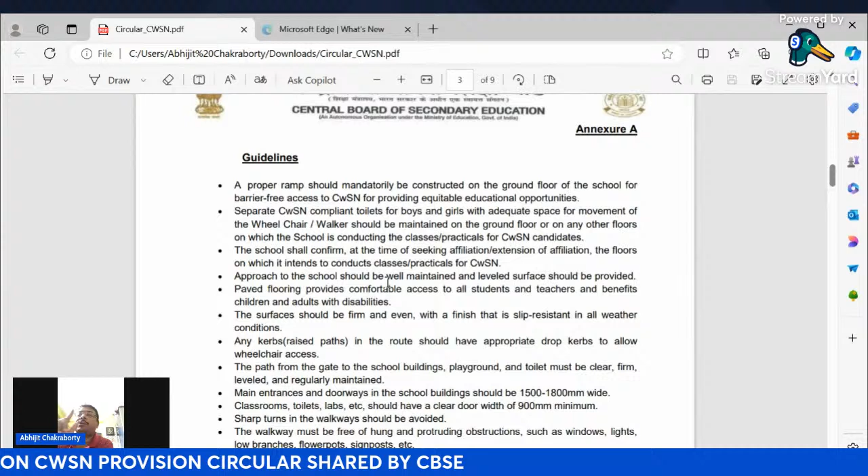Number one, a proper ramp should be mandatory to be constructed on the ground floor of the school for barrier-free access to CWSN, providing equitable educational opportunities. The accessibility of the ramp from ground floor to top floor is common for all CBSE schools, but what is not common, I am going to discuss.

Number two, separate CWSN compliant toilets for boys and girls. We know about girls toilet, boys toilet with CWSN. The wheelchair or walker should be maintained on the ground floor or any other floor where the school conducts classes or practicals for CWSN candidates. It will be better if the CWSN candidate's class is taken on the ground floor.

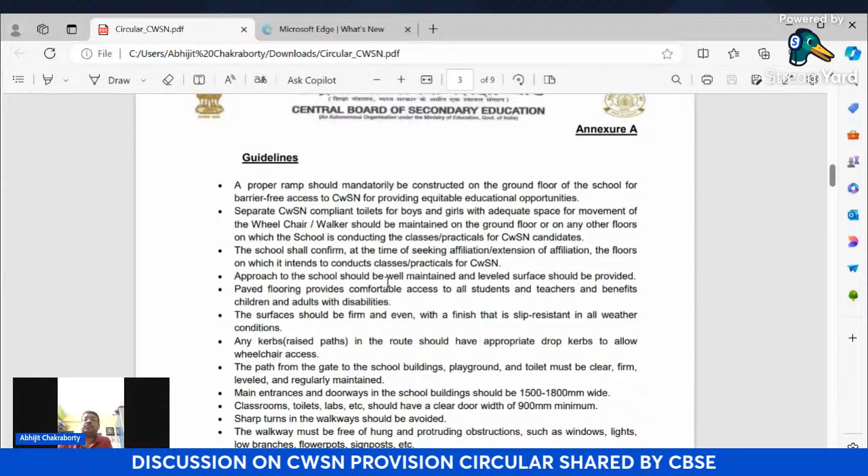The school shall confirm at the time of seeking affiliation the floors on which it intends to conduct classes, practicals for CWSN. That means specification will be given as to which floor the CWSN candidates will take classes. My suggestion is that it should be on the ground floor, which will be good for the CWSN candidates.

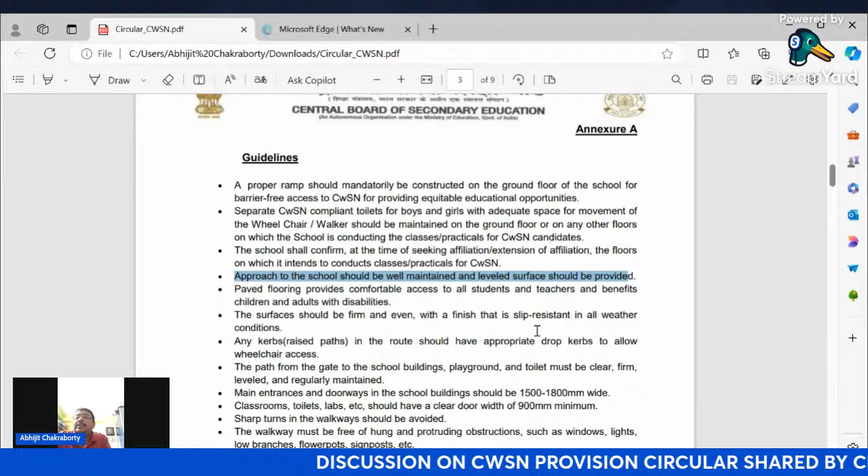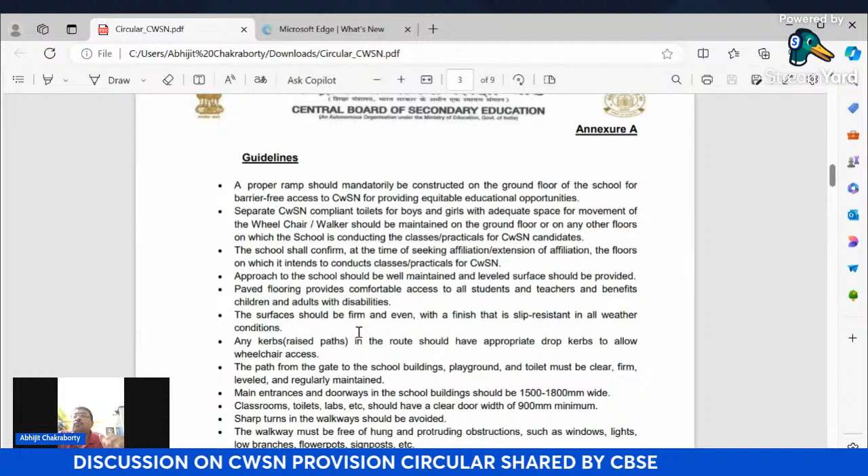Next is approach, a very important thing. The approach of the school should be well maintained and a level surface should be provided. That was not in the previous circular, but it is included in this circular. Paved flooring provides comfortable access to all students and teachers and benefits children with disabilities. The surface should be firm, even, with a finish that is slip resistant in all weather conditions.

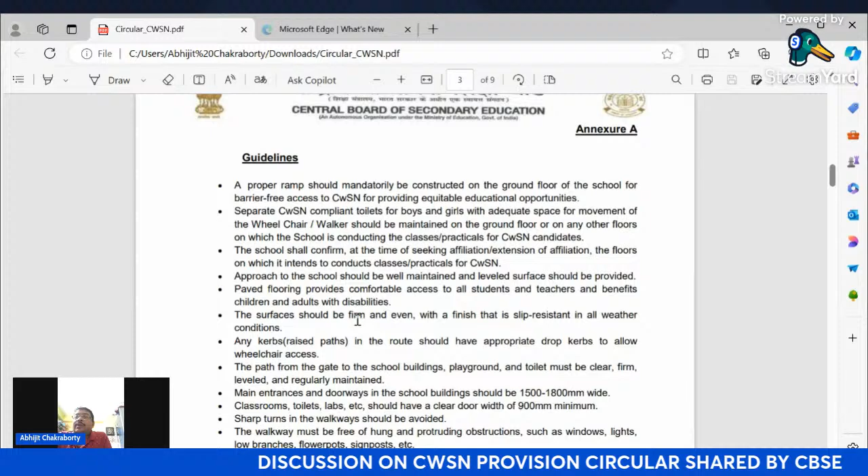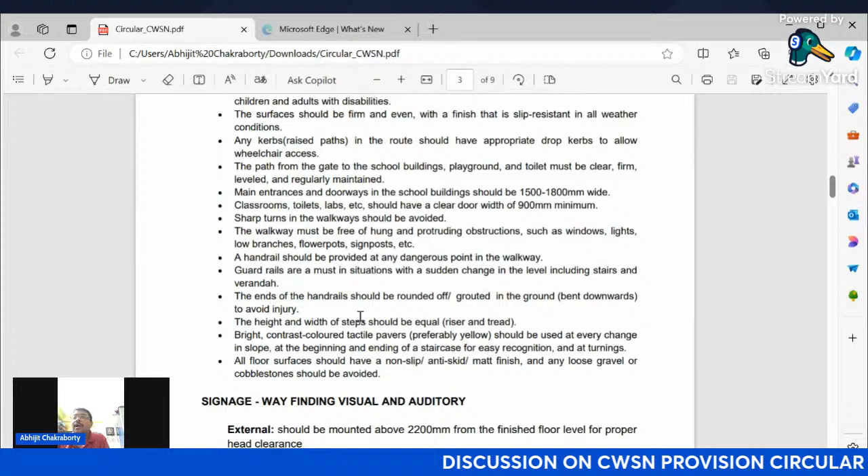Whenever you construct anything, take care about the floor - it should not be slippery. Any kerbs or raised paths in the route should have appropriate drop kerbs to allow wheelchair access, so wheelchairs can move freely. Now, very important - the main entrance and doorways in the school building should be 1500 to 1800 millimeter wide. That is included here.

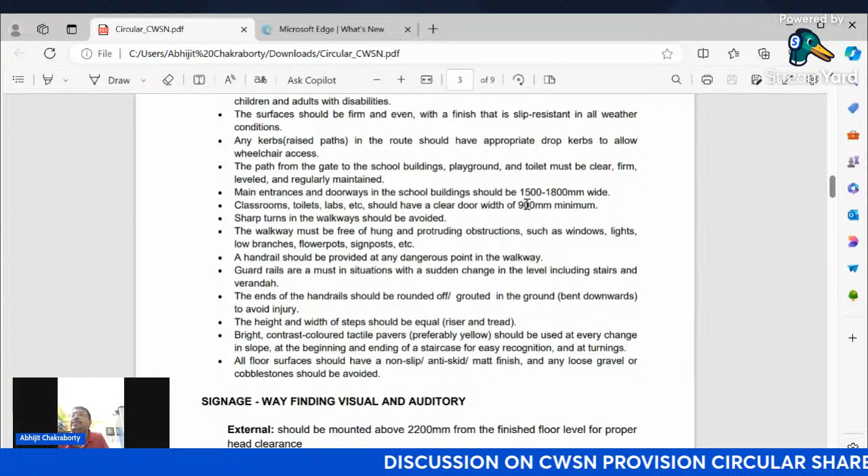It was not in the previous circular. The front road entrance doorways should be 1500 to 1800 millimeter wide, and the classroom and toilet should have a clear door. The door specification given is 900 millimeter minimum. This specification has also been given here.

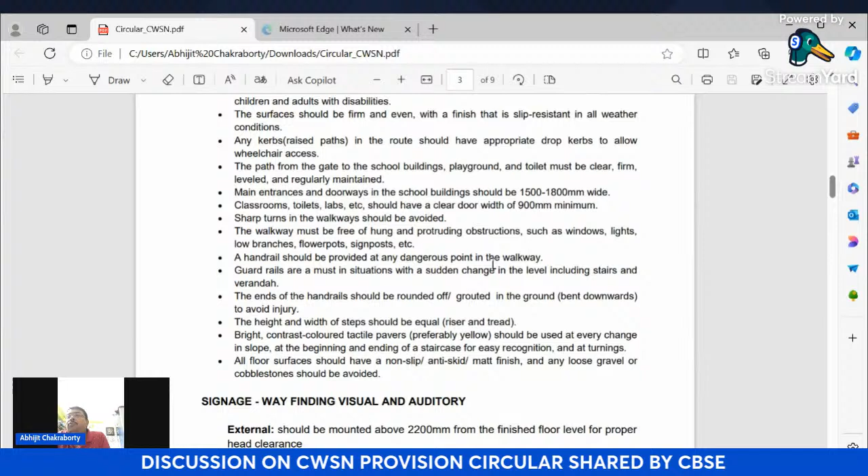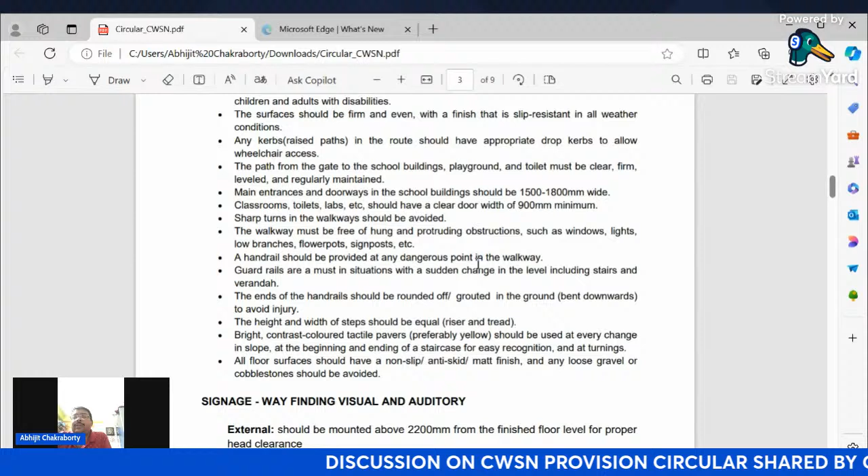Sharp turns in the walkway should be avoided. The walkway must be free of hanging and protruding obstructions such as windows, lights, low branches, flower pots, and sign posts - meaning there will be no obstruction. Handrails should be provided at any dangerous point in the walkway. Guardrails are a must at places with sudden changes in level, including stairs and verandas. The ends of the handrail should be rounded off, grouted to the ground, and bent downward to avoid injury.

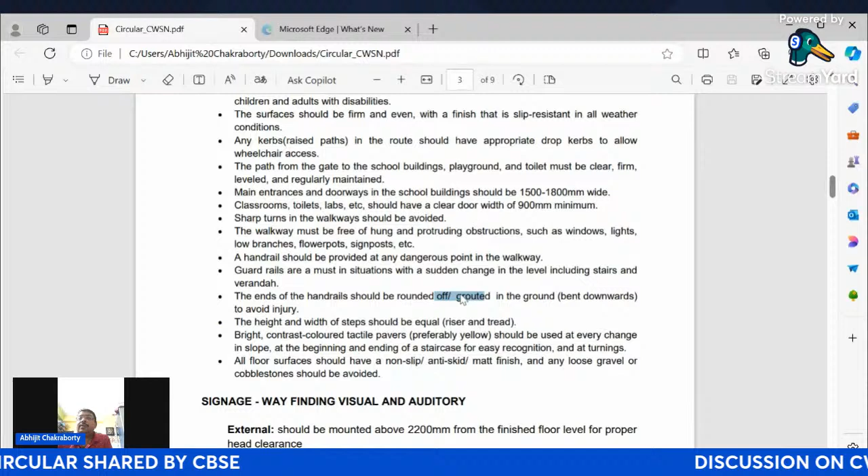The height and width of the steps should be equal. Bright and contrast colored tactile pavers, preferably yellow, should be used at every change of slope, at the beginning and ending of the staircase, for easy recognition at the turning. All floor surfaces should have a non-slip anti-skid matte finish. That is very important.

Signage - wayfinding, visual and auditory. External signage should be mounted above 2200 millimeter of the finished floor level for proper head clearance. Internal signage should be placed 1400 millimeter to 1600 millimeter from the finished floor level on the wall.

Next, the international symbol of accessibility should be displayed for all accessible services, and this signage has also been given here. A proper ramp should be mandatory and constructed to access the ground floor of the school building. We already know about the ramp.

If the school conducts classes or practicals for CWSN on any floor other than the ground floor, it shall mandatorily make provision for a lift or ramp to access that floor. The gradient for indoor gentle slope is 1:15 maximum. For outdoor, for the first floor and above, a 1:15 or 1:20 gradient ramp is advised, with 1500 millimeter width if you go for the ramp.

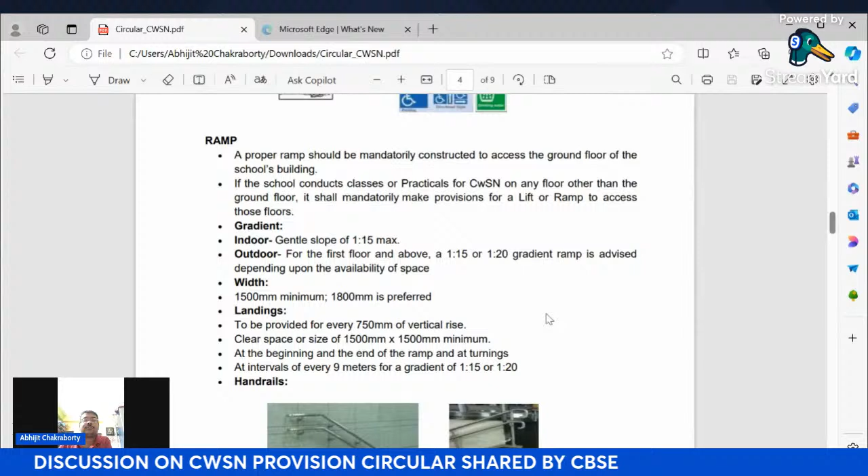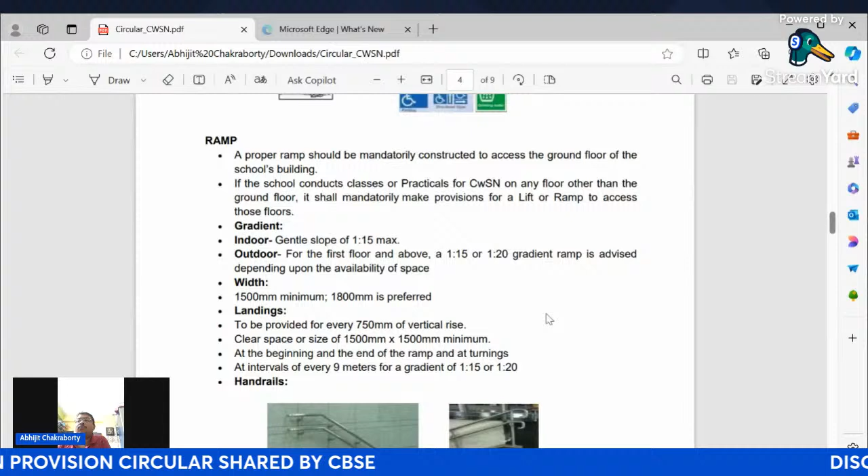Landings should be provided at every 750 millimeter of vertical rise. These specifications have been given because I have visited many affiliated or soon-to-be affiliated schools and seen the condition of ramps that are not suitable for CWSN candidates. So landing will be provided at each 750 millimeter of vertical rise, with a clear space of 1500 millimeter minimum at the beginning, ending, and turning of the ramp, at intervals of every 9 meters for a gradient of 1:15 or 1:20.

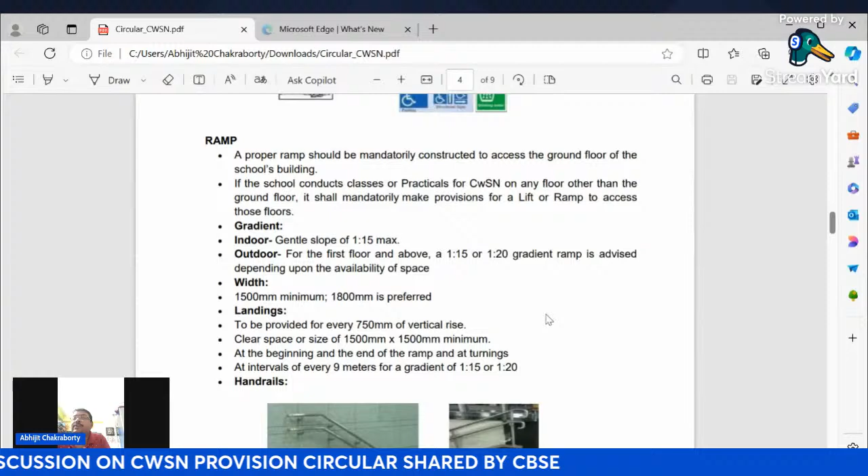The handrails, you can see the picture here. These are the pictures. To be both sides in two heights, the height specification has also been given, that is 760 millimeter to 900 millimeter, painted in contrast color against the background wall.

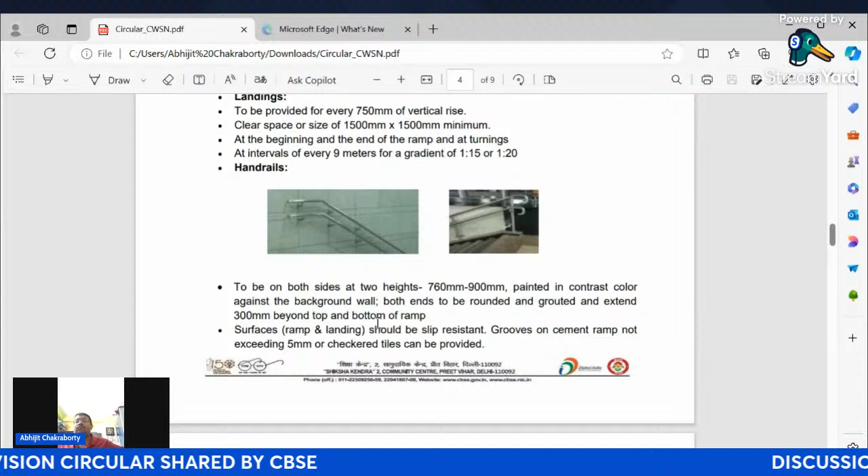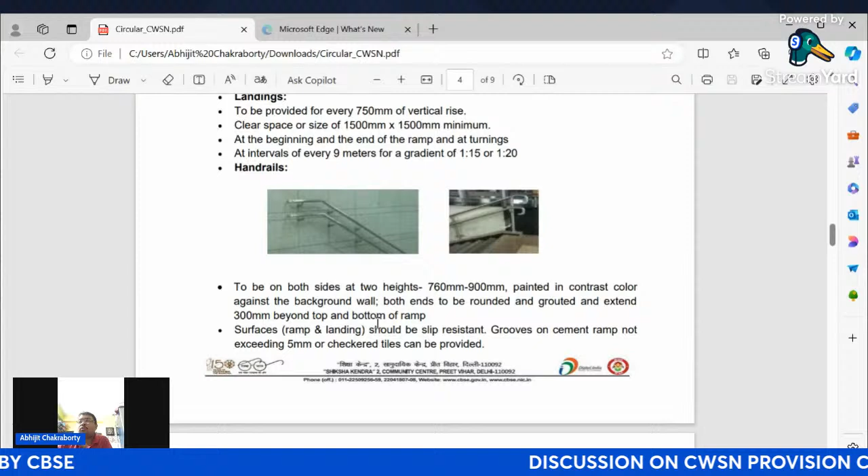This is from the 2023, 6th March circular that CBSE has already circulated. The grooved handrail should be extended 300 millimeter beyond the top and bottom of the ramp. Surface should be slip resistant, with grooves on the cement ramp not exceeding 5 millimeter, or checkered tiles can be provided.

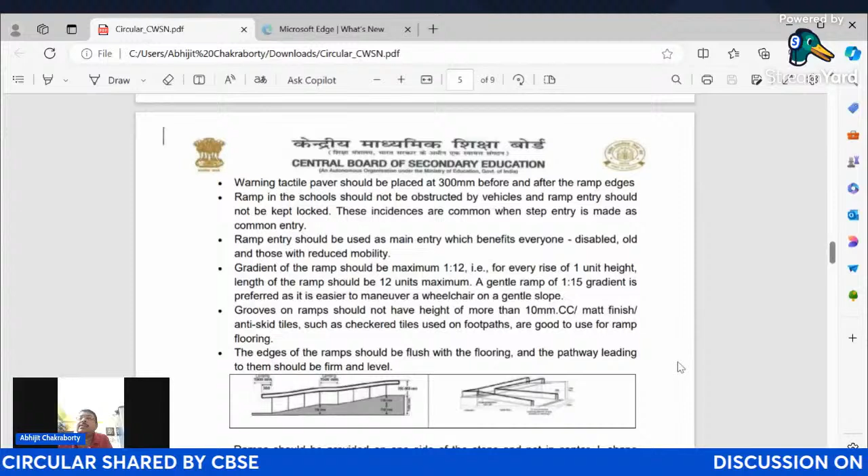Next, warning tactile paver should be placed at 300 millimeter before and after the ramp edges. Ramp in the school should not be obstructed by vehicles, and the ramp entry should not be kept locked.

These incidents are common when step entry is made as the common entry. Specifications have been given, as you can see in the picture. Ramp entry should be used as the main entry, which benefits everyone, disabled or non-disabled. Gradient of the ramp should be maximum 1 is to 12, that is for every rise of 1 unit height.

Length of the ramp should be 12 units maximum. A gentler ramp of 1 is to 15 gradient is preferred, as it is easier to maneuver a wheelchair on a gentle slope.

Grooves of the ramp should not be higher than 10 millimeter. Matte finish anti-skid tiles are very important, because for beautification purposes we have sometimes avoided anti-skid tiles, using different kinds of tiles instead for the beautification of the school — that should be avoided.

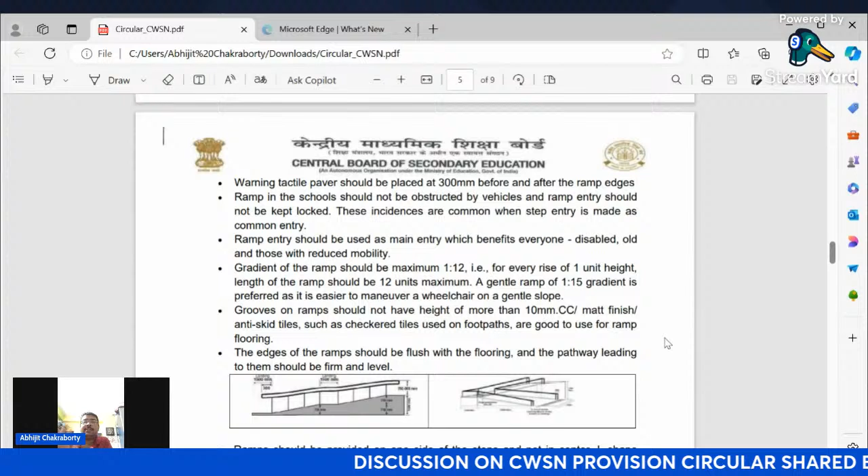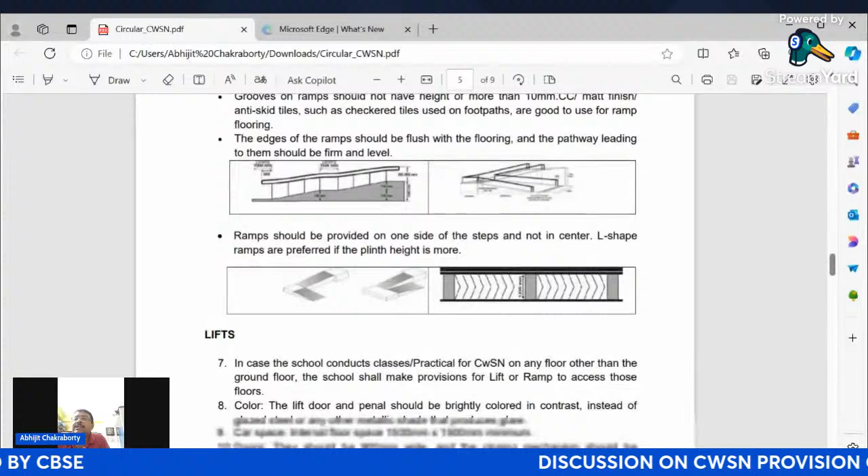The edges of the ramp should be flush with the flooring, and the pathway leading to them should be level. A ramp should be provided on one side of the steps and not in the center, and L-shaped ramps are preferred if the plinth height is more.

So you can see the condition of the ramp and how we are going to provide it, and what are the important things to take care of.

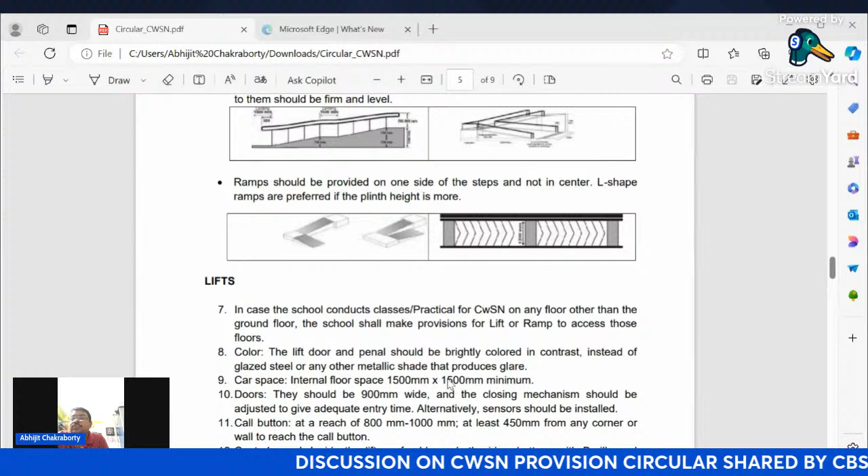Next, lifts, if there will be a lift. In case the school conducts classes and practicals of CWSN on any floor other than the ground floor, the school shall make provision for lift or ramp to access those floors.

What will be the color? The lift door and the panel should be brightly colored in contrast, instead of glazed steel or any other metallic shade. If there is any other metallic shade, you should avoid that.

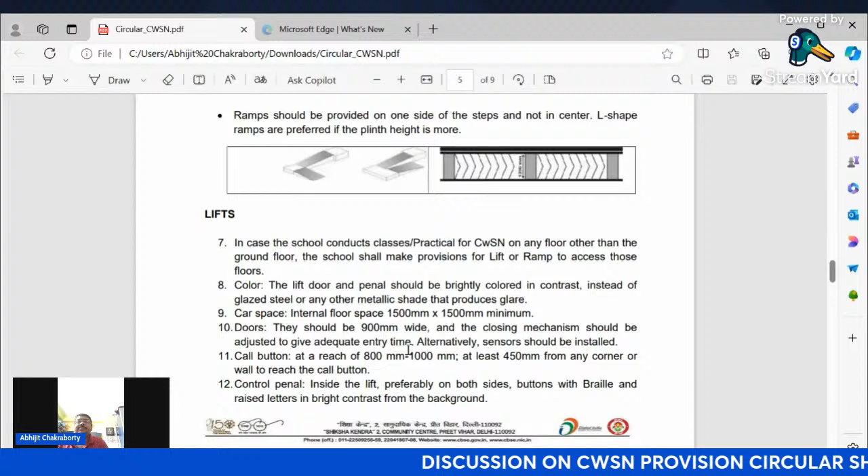Car space: internal floor space should be 1500 millimeter by 1500 millimeter minimum. Doors should be 900 millimeter wide, and the closing mechanism should be adjusted to give adequate entry time. Alternatively, a sensor should be installed.

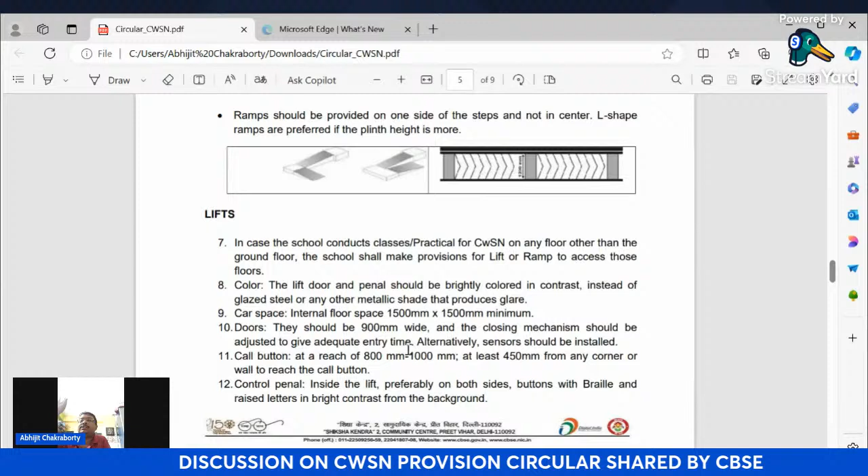Call button at a reach of 800 to 1000 millimeter, at least 450 millimeter from any corner or wall to reach it. Control panel inside, preferably on both sides, with buttons in braille and raised letters in bright contrast against the background.

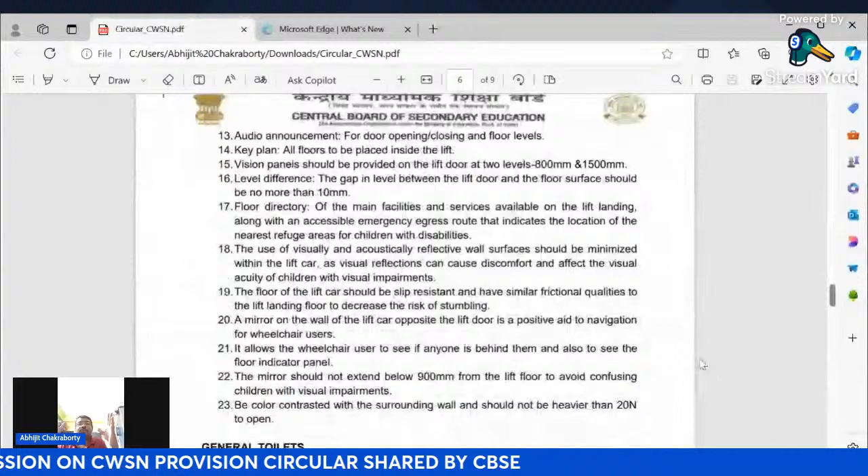There should be an audio announcement for the door opening and closing. A key plan of all floors should be placed inside the lift. A vision panel should be provided on the lift door at two levels, 800 millimeter and 1500 millimeter — take care of this while purchasing the lift.

Level differences: the gap between the lift door and the floor surface should not be more than 10 millimeter. A floor directory of the main facilities and services available should be placed at the lift landing, along with the accessible emergency egress route indicating the location of the nearest refuge areas for children with disabilities.

The use of visually and acoustically reflective wall surfaces should be minimized within the lift car, as visual reflection can cause discomfort and affect the visual acuity of children with visual impairment.

The floor of the lift car should be slip resistant and have similar frictional qualities as the lift landing floor, to decrease the risk of stumbling.

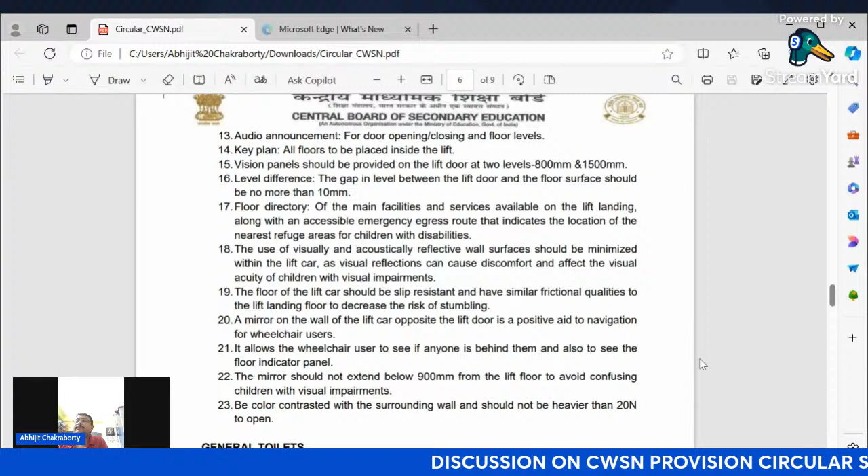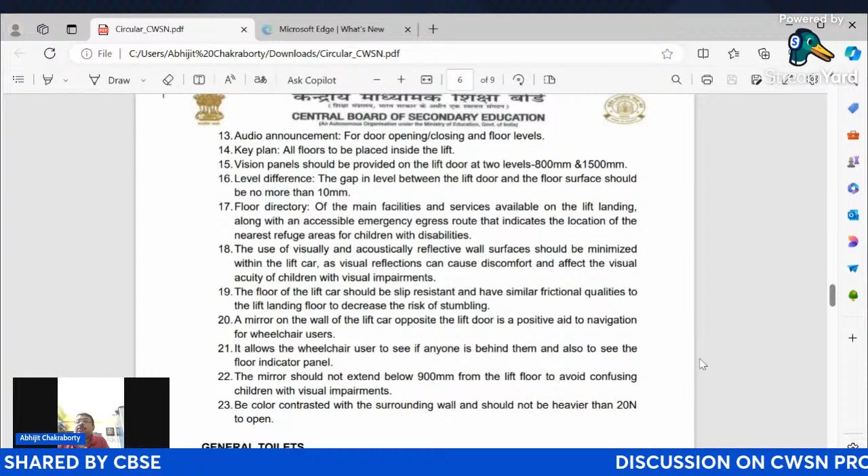A mirror on the wall of the lift car opposite the lift door is a positive aid to navigation for wheelchair users. There should be a mirror on the wall, allowing the wheelchair user to see if anyone is behind them and also to see the floor indicator panel.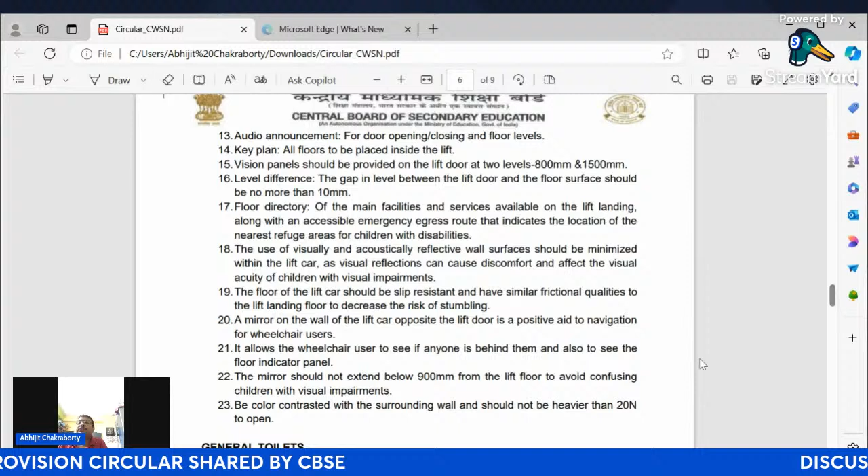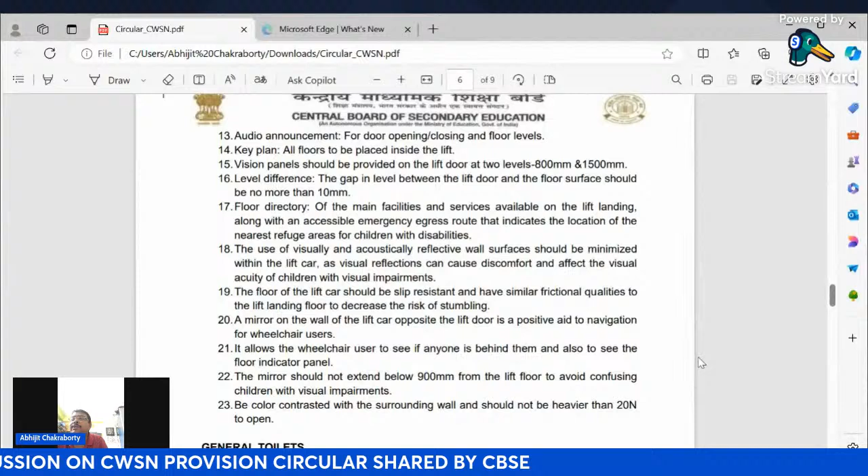The mirror should not extend below 900 millimeter from the lift floor, to avoid confusion for children with visual impairment. It should have a big color contrast with the surroundings, and the door opening force should not be heavier than 20 newtons.

What will be the general toilet? These are the general toilets.

For children with visual impairment, braille or raised alphabets should be mounted on the wall next to the door near the latch side, at a height of 1400 to 1600 millimeters. A warning strip with a rubber door mat should be provided 300 millimeters before the toilet entrance.

Availability of sanitary material and disposal mechanisms such as incinerators should be provided for girls. Running water in the girls' toilet is essential for menstruation hygiene management, and an overhead water storage tank should be provided for a piped water facility.

All toilet facilities should incorporate a fire alarm with an audio and visual system. This is a new addition, providing audio and visual systems along with the toilet facilities.

The alarm must be located so that assistance can be summoned both when on the toilet pan, at 900 millimeter height, and when lying on the floor.

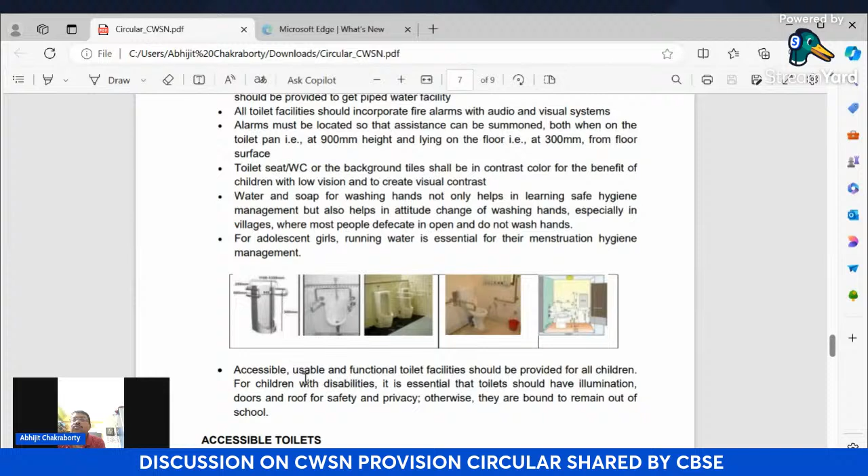Washing hand facilities will be provided in each and every toilet. For adolescent girls, running water is essential for menstruation hygiene management.

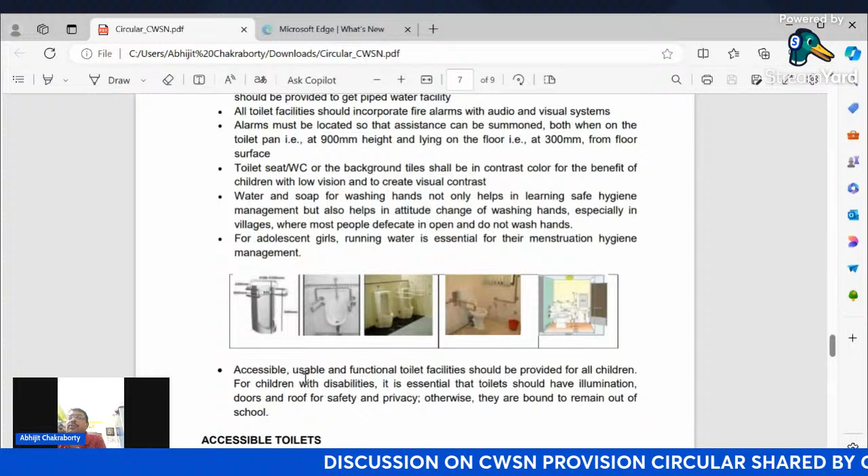Accessible and usable functional toilet facilities should be provided for all children. The accessible toilet, in terms of CWD toilets, should be located within 3 meters of the main entrance and exit of the school — it should not be far away.

Minimum one toilet compartment should have enough space for a wheelchair user to enter, with a minimum space of 2000 millimeters by 2200 millimeters. A door with a clear opening of at least 900 millimeters should be provided, with the door swinging outward or being of folding/sliding type.

The toilet cubicle should have slip-resistant flooring, with a switch near the WC at 300 millimeters and another at 900 millimeters from the floor level, and flooring with an anti-slip matte finish. The door should have a horizontal foot bar at least 600 millimeters long inside, and handrails all through the toilet cubicles.

Now for the wash basins: a warning tactile paving should be placed in the wash basin for children, at 550 millimeters and 410 millimeters, mounted on the top edge between 700 and 800 millimeters from the floor, with knee clearance of at least 760 millimeters.